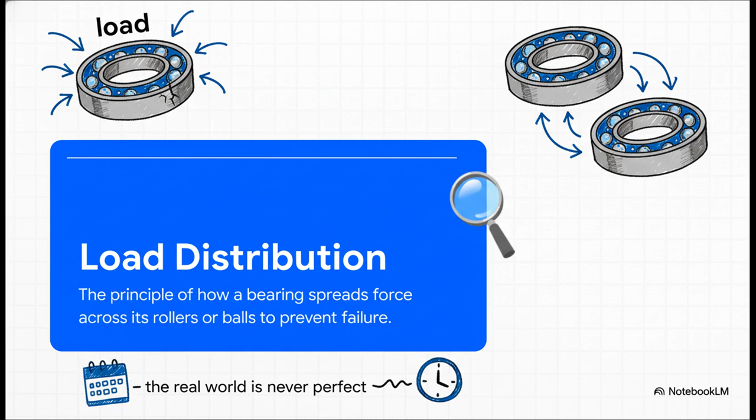Okay, so it all kicks off with this one core idea, load distribution. On paper, it's this beautiful, clean concept. A bearing takes a massive force and just spreads it out perfectly, evenly, across all its little rollers or balls. It's a neat calculation, but you know where this is going, right? The real world is never that simple.

And this is where it gets really interesting. This slide just lays it all out, the massive gap between theory and what actually happens. Our simple models, they give us one number. But when we run these super powerful computer simulations that actually account for the tiny, real-world flex of the parts around it, boom. The load on the most stressed roller suddenly jumps by 15%. I mean, that's not a rounding error. That's a huge deal that can throw an entire design into question.

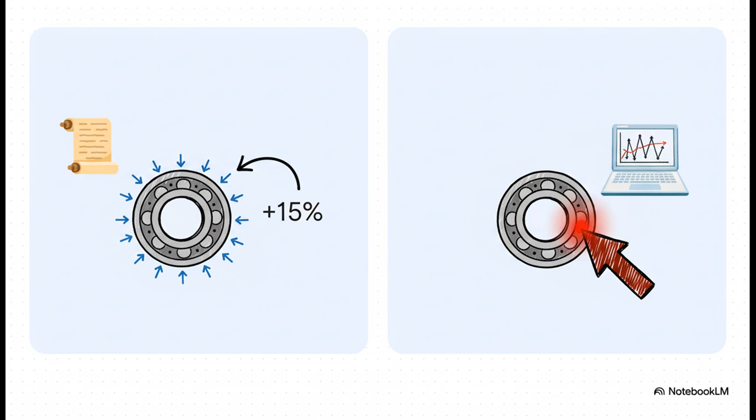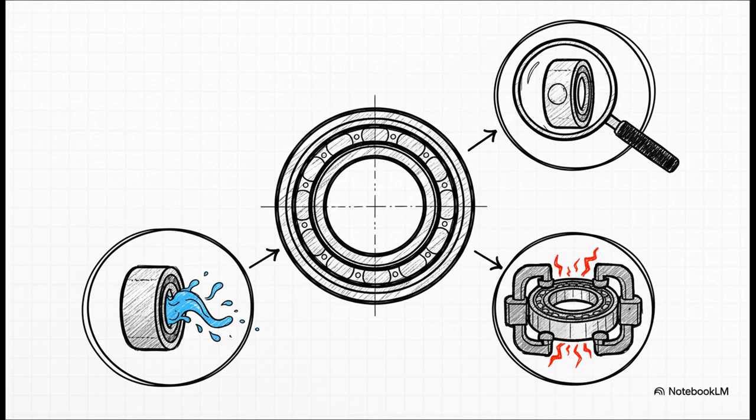So what does this all mean? It means that before a bearing even does a single turn, it's already a minefield of engineering compromises. Tiny microscopic errors from machining can concentrate the load in one dangerous spot. The exact shape of a roller might be great for strength, but maybe it's terrible for how lubricant flows over it. And even when you preload them to make a system stiffer, well, that just throws a whole new wrench into the works with a bunch of internal forces you can't even predict.

All right, so that's the design. But let's move on because this is where the real battle begins. We're talking about a constant, microscopic war against friction. And this isn't just about being efficient. This is a fight against heat, against wear, and against spectacular failure. The only thing standing between a perfectly smooth operation and complete, catastrophic failure is this tiny, microns-thick film of lubricant. It's literally the bearing's lifeblood.

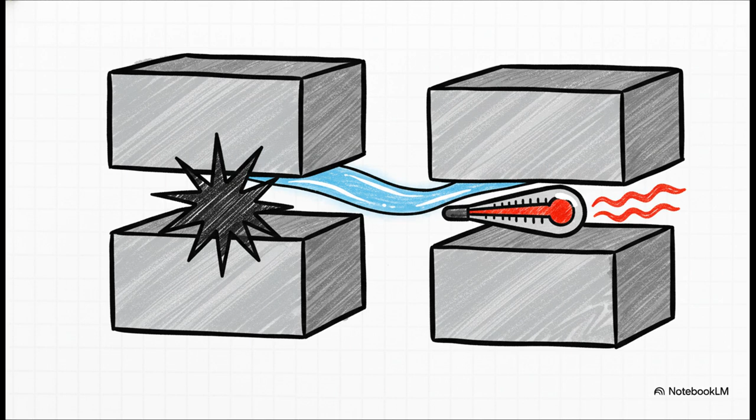But this lifeblood is so fragile. A single speck of dust, a sudden spike in temperature, even the friction inside the oil itself can cause that whole protective film to just collapse. So, what happens when that microscopic shield is gone? What happens when that battle is lost? Well, the results are fast, and they are not pretty.

And wow, this slide really shows you the brutal aftermath. Without lubrication, the metal surfaces just start tearing each other apart. You get something called spalling. That's where the surface just cracks and shatters like a neglected old road. You get flaking, where chunks just break off, and then there's smearing. That's where the heat gets so intense it literally welds the surfaces together for a split second before they're ripped apart again. It is game over.

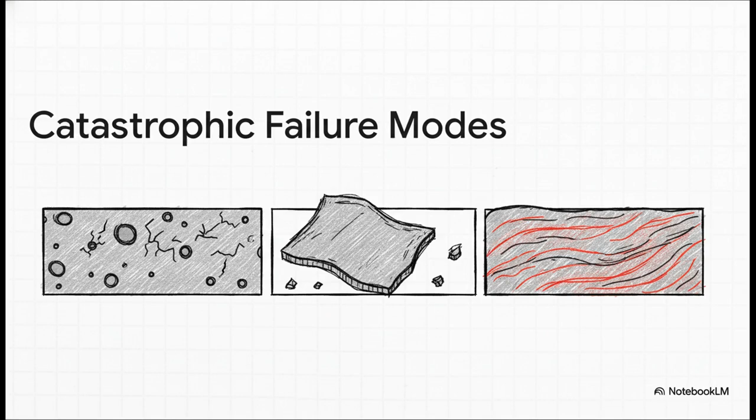Okay, so we've been deep in the microscopic weeds. Let's zoom way out now to the macro world. How on earth do these super sensitive parts actually survive in some of the most punishing environments you can possibly imagine?

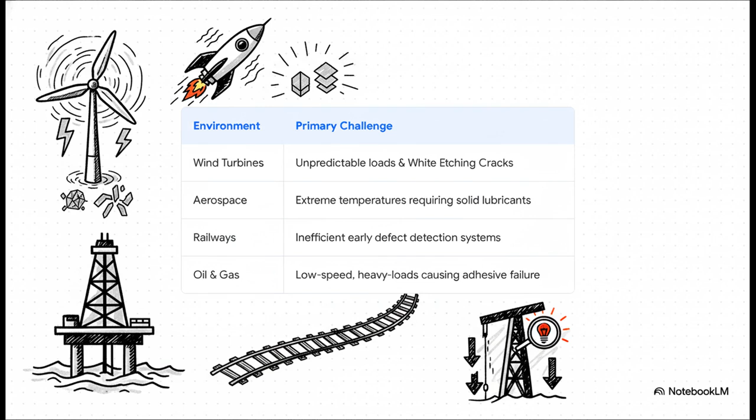And believe me, this is where things get really tough. Pretty much every application is its own special kind of nightmare for a bearing. For a wind turbine, you've got unpredictable winds and this really weird failure called white etching cracks that, get this, scientists still don't fully understand.

In a jet engine, it's so hot you can't even use oil. You have to rely on solid lubricants. And for things like high-speed trains or deep-sea oil rigs, the real challenge is just trying to hear that bearing cry for help before it's way too late.

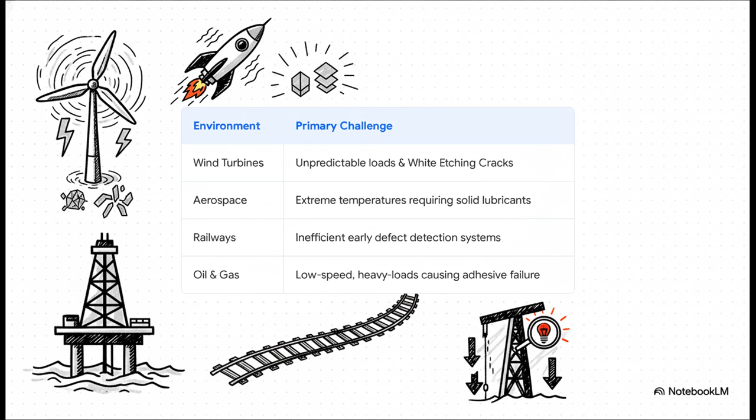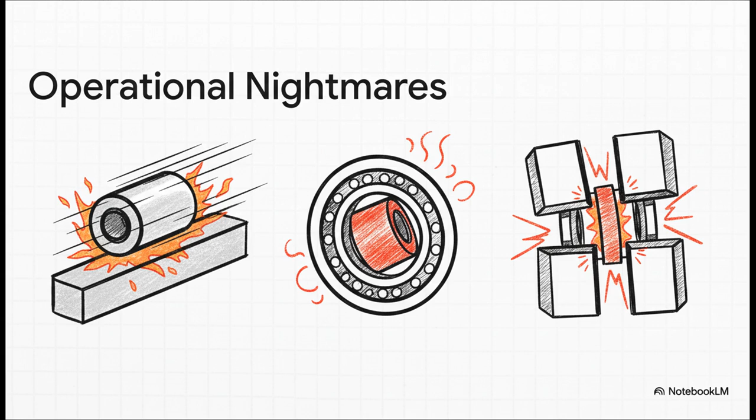Oh, and the list of operational nightmares? It just keeps on going. At really high speeds, rollers can start to skid instead of roll, basically grinding themselves away. If a load is just a little bit off-center, the rollers can twist or skew, and that creates these incredibly dangerous temperature spikes. And in the real world, perfect alignment is basically a fantasy, which means you've always got damaging stress focused right on the edges of the rollers.

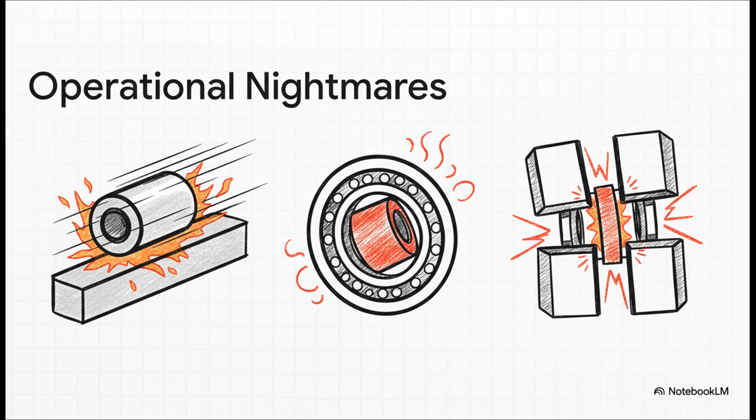So, because failure is so catastrophic and, let's be honest, incredibly expensive, the holy grail here is predicting it. But trying to detect the faint whisper of a tiny failing part inside a massive roaring machine, well, that's one of the biggest challenges in data science. It's like trying to hear a pin drop in the middle of a rock concert. It's a race to find that one signal in an ocean of noise.

And this is exactly why it's so ridiculously hard. First, you gotta gather all this data, vibrations, sounds, everything. But then comes the part that feels almost impossible. You have to filter out all the thunderous noise from the motors, the gears, the housing, everything else that's screaming at you. Then you need an expert who knows the exact subtle frequency to look for. And even if you find it, the signals are so complex that it's super easy to get it wrong.

Of course, we're throwing AI at this problem, but we're running into a classic dilemma. On one hand, you've got your data-driven AI. It's great until you show it something new, a situation it wasn't trained on. Then it just kind of falls apart. So you try a physics-informed model, but that's only as good as our equations. And as we saw at the very beginning, our equations are, well, just not good enough to capture the messy reality of what's actually happening.

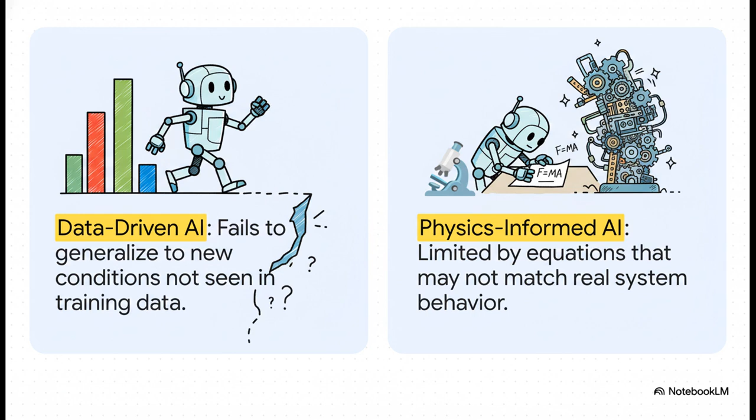And this isn't just a theoretical problem. This has huge, real-world consequences. Take high-speed rail. The systems we have by the tracks are pretty good at catching a bearing that's already screaming in pain, but they're terrible at catching that tiny defect right at the beginning. The bottom line is our monitoring is always playing catch-up, which means we find problems when they're already expensive and dangerous.

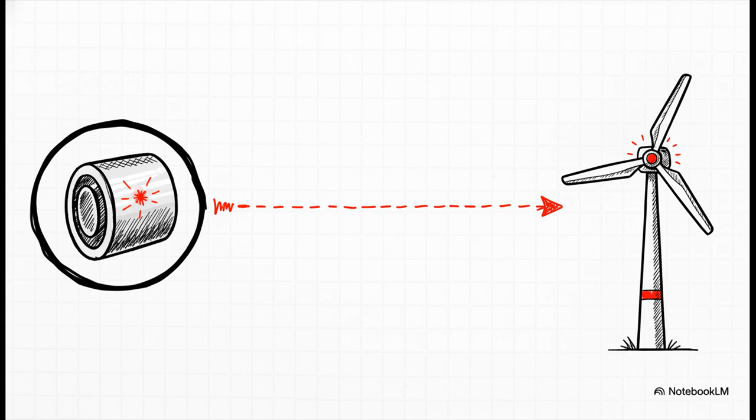So, when you step back and look at the whole picture, what you see is this incredible story that scales from the absolutely invisible to the unimaginably massive. Think about that. One microscopic design choice, one tiny flaw in a roller, can create a ripple effect that ends up threatening a billion-dollar wind farm or grounding an entire fleet of aircraft.

And that really brings us to the big final question, doesn't it? Our ambition to build faster, hotter, more powerful machines is constantly pushing the limits. But that ambition is always going to be chained to our ability to solve these tiny fundamental challenges. So the question is, as our technology screams into the future, can the engineering of this tiny, unsung hero possibly keep up?